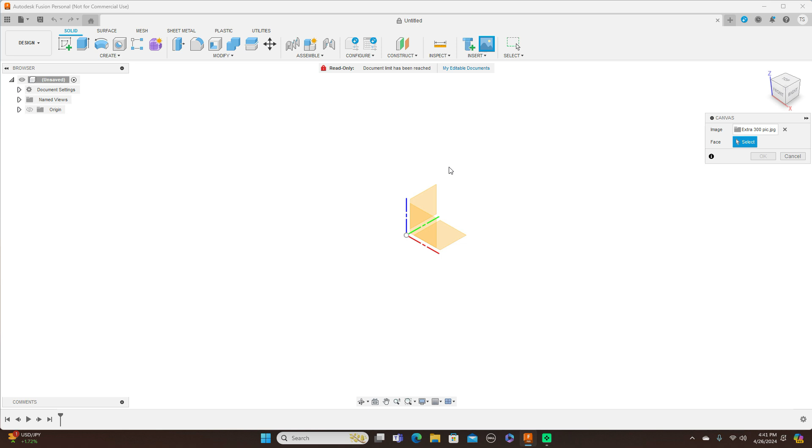First I'm going to need some pictures of the Extra. To insert them on a canvas, I come up here to insert, click on canvas, then insert from my computer, go to my D drive, Extra 300 pics, open that, and put this picture on this plane, because this is going to be the side view. Then drag this out and click OK.

Next, come over here to Canvases and change the name of this to Side. Then right click on side and click calibrate. I'm going to make this 2 meters long, so I'll measure from here all the way to back here and change this to 2000 millimeters, which is 2 meters.

Click enter. Now the picture disappeared because it made it much bigger, so I'll use my middle scroll wheel and scroll in. Turn on the origin over here. Now I want to line this front nose here to right here, so I right click on side again and click edit canvas, then move the little square till this is about there.

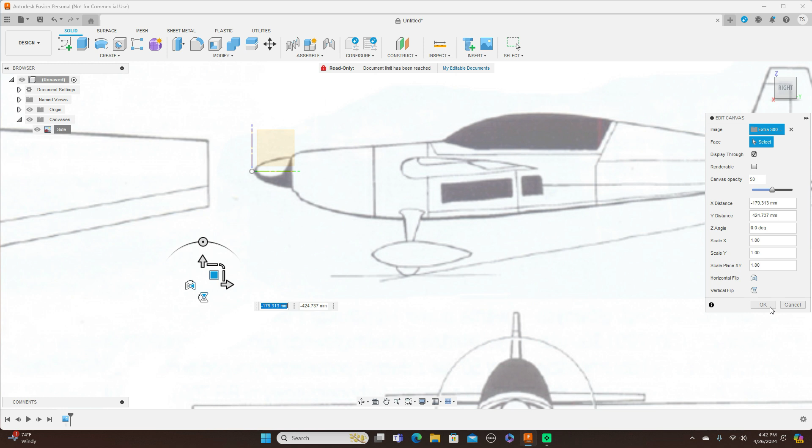Click OK. I'm going to do the same thing for the top view and front view. Turn this over here, come up to insert, canvas, insert from my computer, extra picture, open, click on this, drag this out. This is the top view, which is this view here. I need to rotate this, or you can just flip it, which I did.

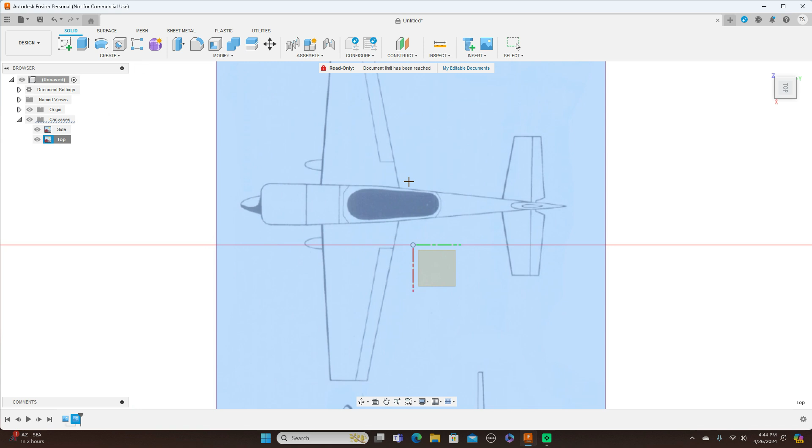Click OK, move it down a little first, then click OK, and rename this top. Right click on the top and calibrate, and this is 2 meters again, here to here.

Right click on top again, and this time click edit canvas, because we're going to move this nose to here also. Click OK. And that's what we have so far.

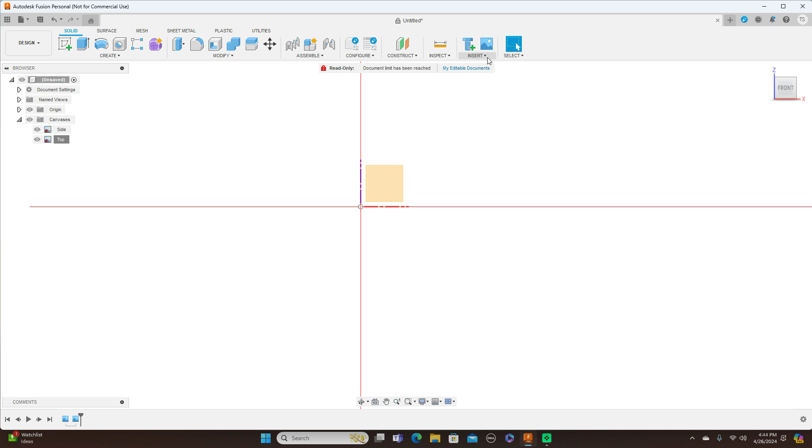Add one more picture to the front. Come up here, insert, canvas, insert from my computer, this picture here, open. This is the face. Click OK, change this to front.

Right click on the front and click edit canvas. I'm going to move this center to this center point up here, so I drag this square here. One thing I forgot to do is calibrate this, so let me cancel this.

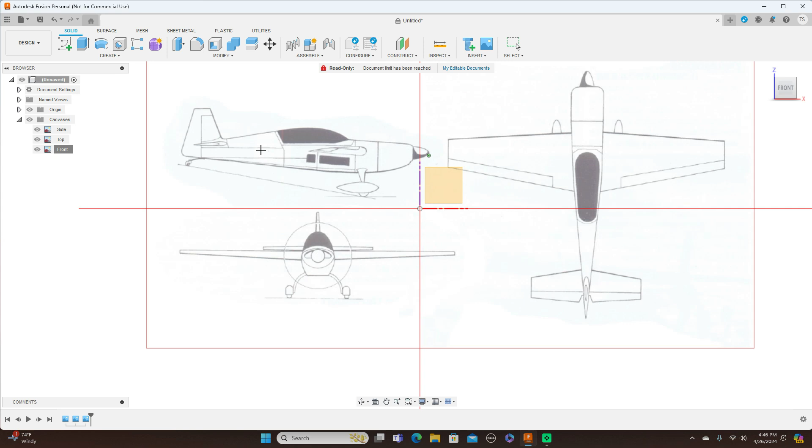Come up to the front over here and click calibrate, and set this to 2000, click enter. Now come over here to the front, right click and edit canvas, then move this nose over. Click OK. Now we have this.

All our pictures are in. Come over here to create form.

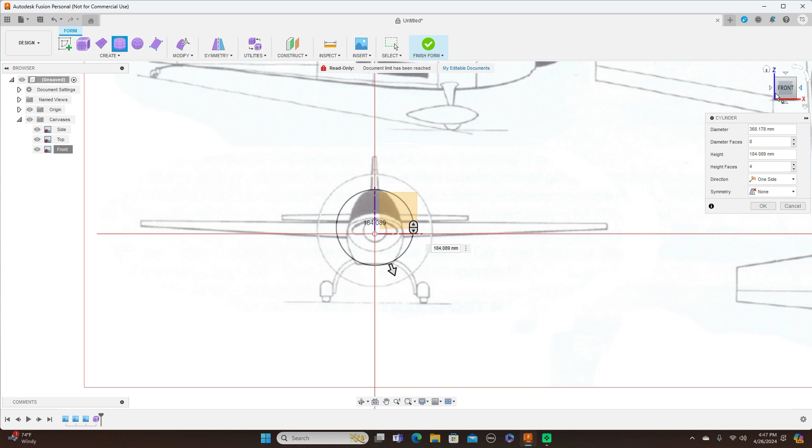And I'm going to use a cylinder. Click on this plane here, and for the cylinder, just imagine this is the circle in the center where I'm going to start. About right there, drag this out, click, one click. Turn to the side view, pull this all the way back.

Let me move this in a little because this is just a fuselage and not including the spinner, so move this in about what I think that spinner is. Add some height faces here, and click OK.

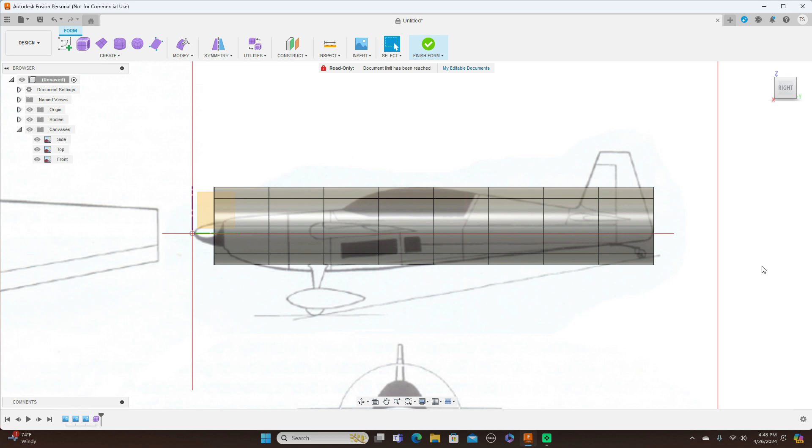What I want to do is select this whole thing here and move it back. Click OK. Double click this line here, and I'm going to move that back a little. Click OK for now.

Have a look. All right, now we begin the process here. Double click these to select the complete ring around.

Now this Extra 300 is not a difficult airplane to model, and I selected this one just for practice, since some people want to learn how to model aerobatic planes as well.

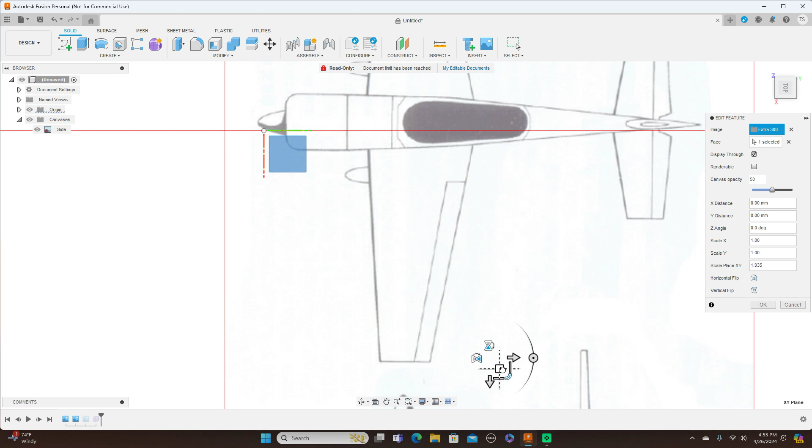Drag this wheel out a little. Okay, now that's a little too big, I'll drag this in a little more. And that's about right. So now we do here, edit this, and we're back to this.

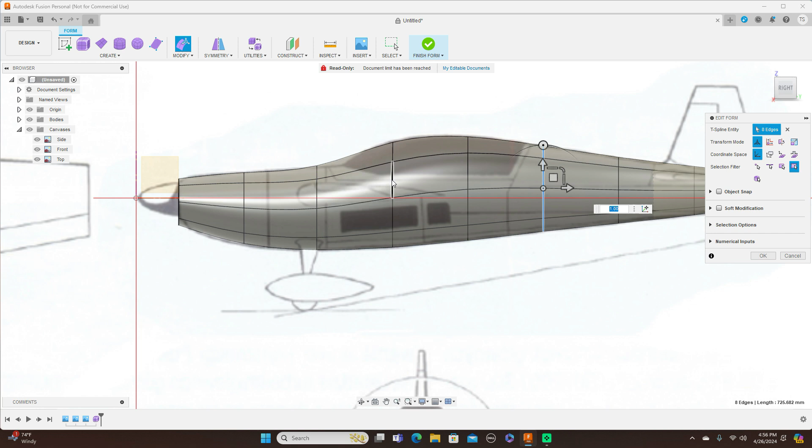Okay, this is what we have so far. Now I'm going to add another edge right here. Double click this line here, come up here to modify and insert edge, change this to exact, and click OK.

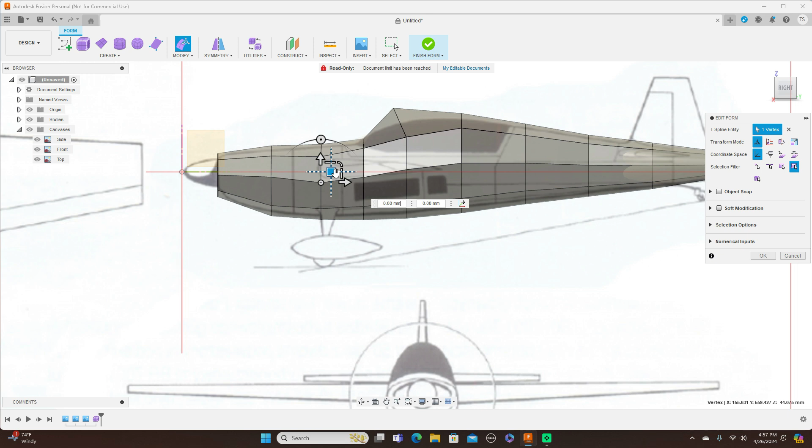Okay, let's look at this in box mode, which is Alt 1. And I'm just going to straighten these up. Okay, and get out of box mode is Alt 3. And that looks pretty good.

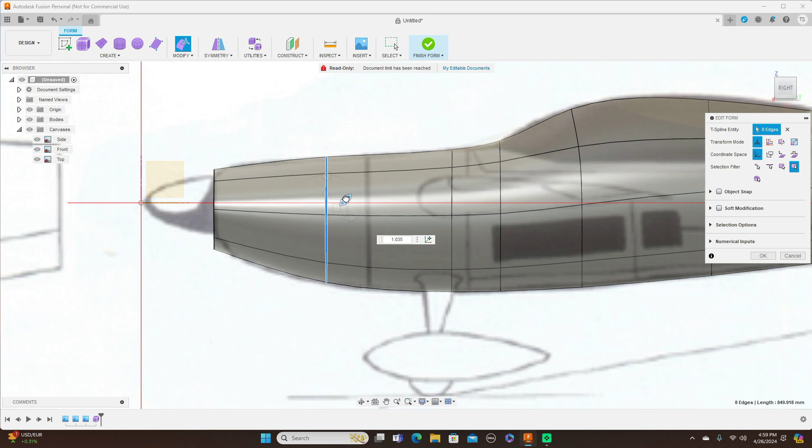Didn't like that. Okay, now this there.

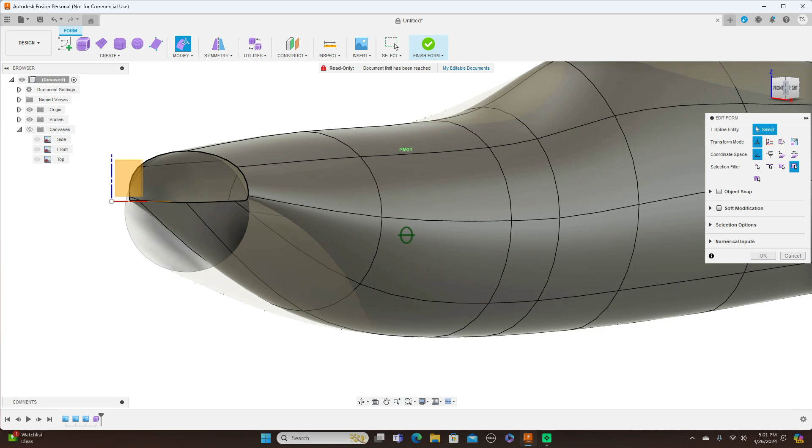Now what I want to do here is click this. I'm going to have to put a line in here. Let me cancel this, go back. Okay.

I need to put another section here. So double click this line, come up here to modify, insert edge, and click OK.

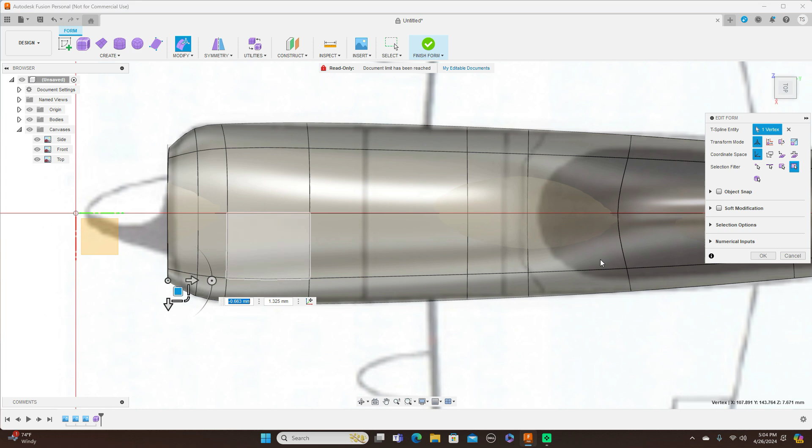And I put another edge here. Let's see what we have so far. All right, looking pretty decent. I want to pull this out here, or edit.

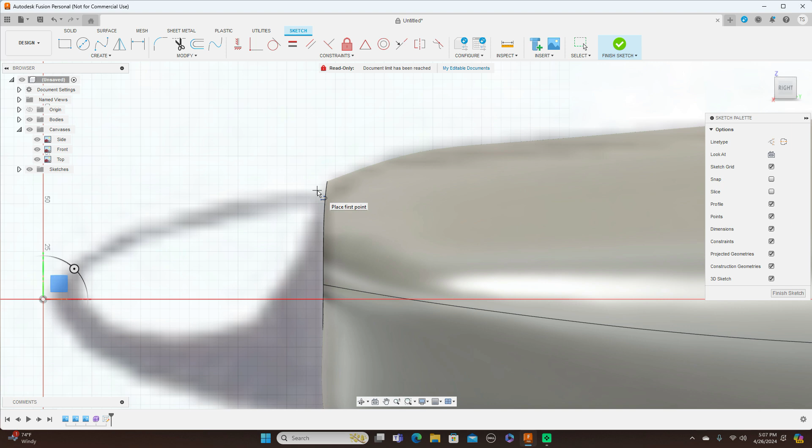Now, I'm going to do the spinner. The spinner just create on this plane here, and I'm going to draw a line from here.

Then come over here to fit point spline, click this, click on this line here, and get the shape of your spinner.

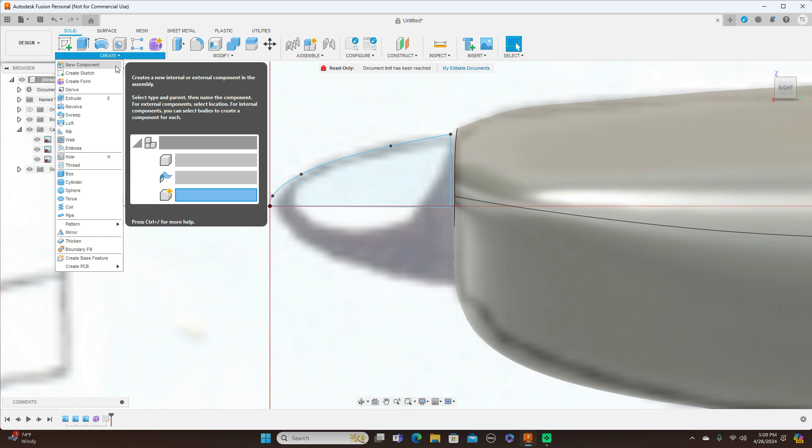Okay, that looks pretty decent, profile of it. Go ahead and finish sketch. Come over here to create and revolve. We want to—not revolve, there, okay. Select profile, profile is selected, and the axis is going to be this. And click OK.

Look at this from the front, and it looks pretty good. The spinner can go up a little.

So if I want to move this, just come over here to bodies, and it's the spinner. Right click on it and move. You could have did it this way here, or you could have clicked this, then click this. But do it this way: move copy, and just move this up a little. Click OK.

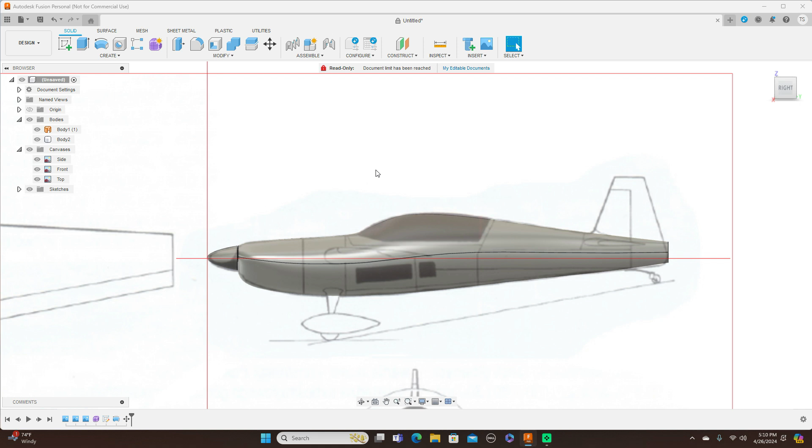Turn off the canvases. We have that. And turn the canvases back on. Now I'm going to do the wings. Let's go ahead and turn the bodies off.

And we come up here to create sketch. I want to create a sketch on this plane here, and I'm going to draw a line—L for line, or come up here to create and do it—from there, a line about from here to about here. Then look at this from the top, and you can see that's about where the wing is there. This needs to come back a little more here, so just drag this back. And finish sketch.

I'll come up here to construct, plane at an angle, and this is the line we're going to use. This is 0 degrees, and click OK. Now we have this line here.

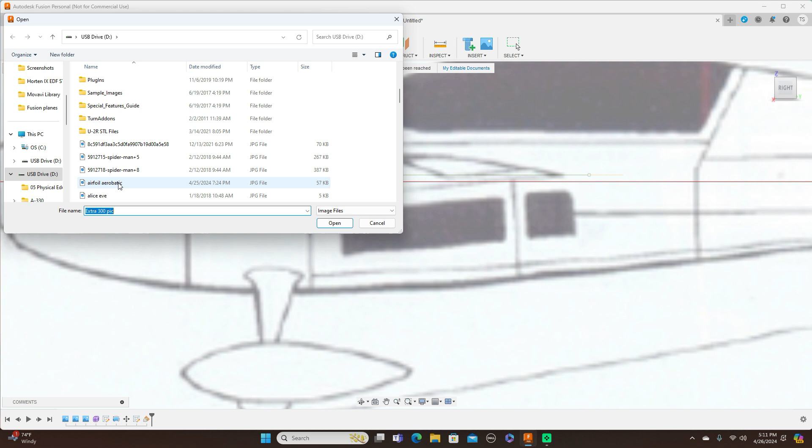What I want to do now is insert an image of the profile. So come up here to insert, canvas, insert from my computer, and this is a wing. Flying wing, no. This is it right here, airfoil aerobatic. We open that. Want to put it on this profile here.

Scroll out to make it bigger, then I'm going to move this back. And I'm using this one right here, then line that up. That looks good, and click OK.

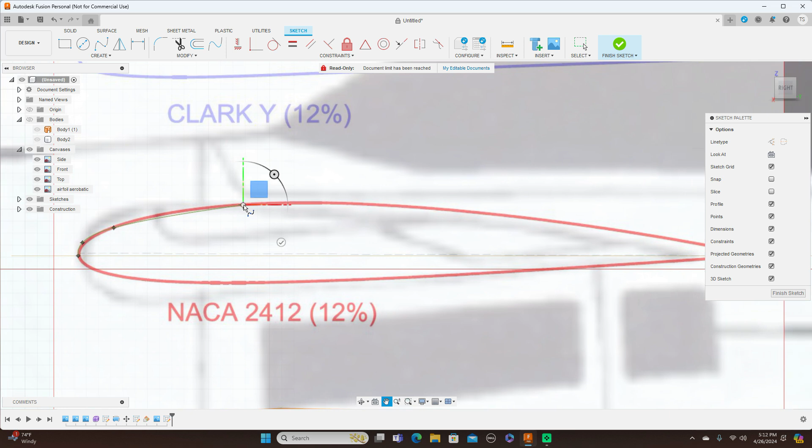Now we're going to trace this. So we come up here to create sketch on this plane here, and I'm going to trace this with fit point spline. Put another one here.

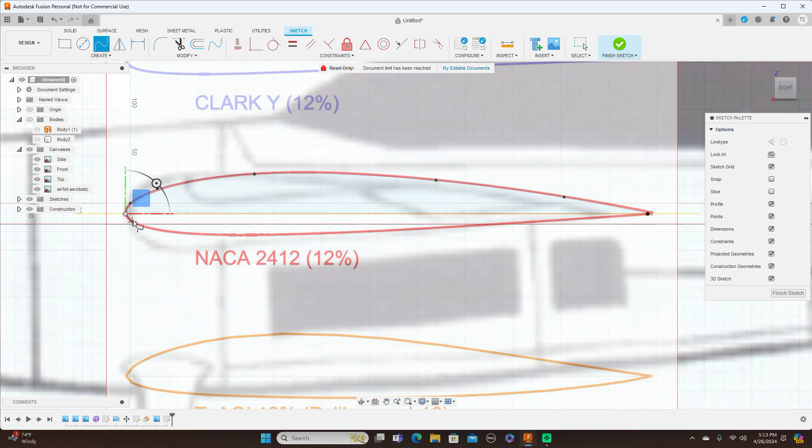Draw a line from the leading edge to the trailing edge, and trace the bottom of it. Okay, finish sketch, and we can turn this off.

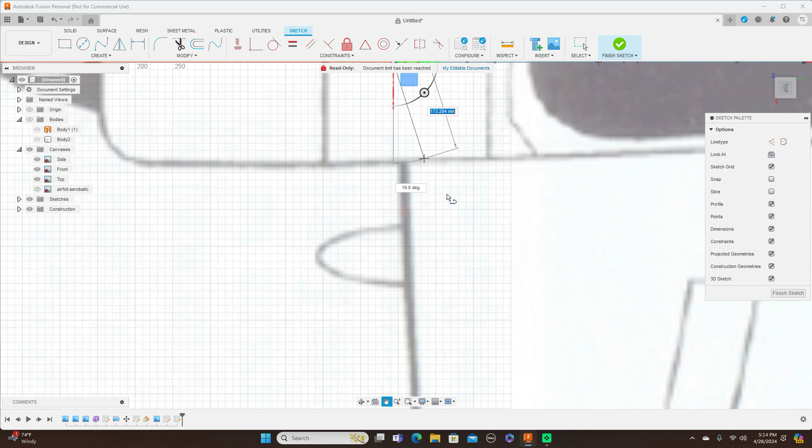Now we're going to create a sketch on this plane here, so I click this plane and come up here to create sketch. Click that. Then I'm going to use a line, just dragging this out to make sure I get the proper one, which is this here. And another line for the back. Go ahead and finish sketch.

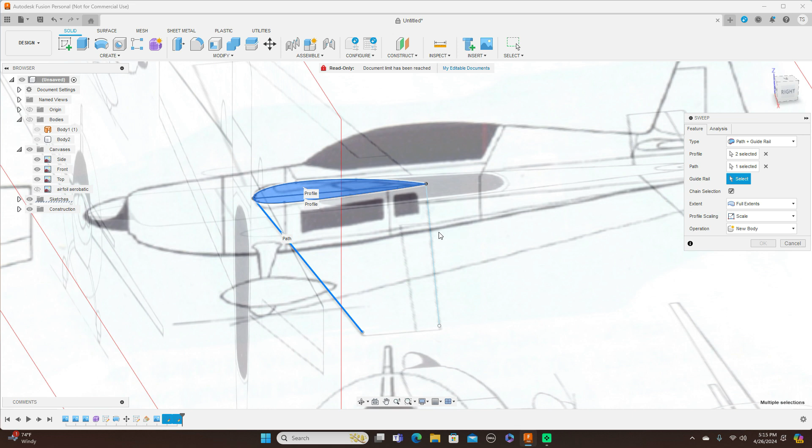Then come over here to create, use a sweep, and we're going to change this to path plus guide rail and change this to full extents. Then we click this profile and this profile. The path, this line, and the guide rail, this line, and click OK. And turn the bodies back on.

Turn the canvases off, and we have this now. Come over here to create, mirror, this, and the mirror plane is going to be this. And leave this as join, click OK. And we have this.

Turn the canvases back on. Create a sketch on this plane.

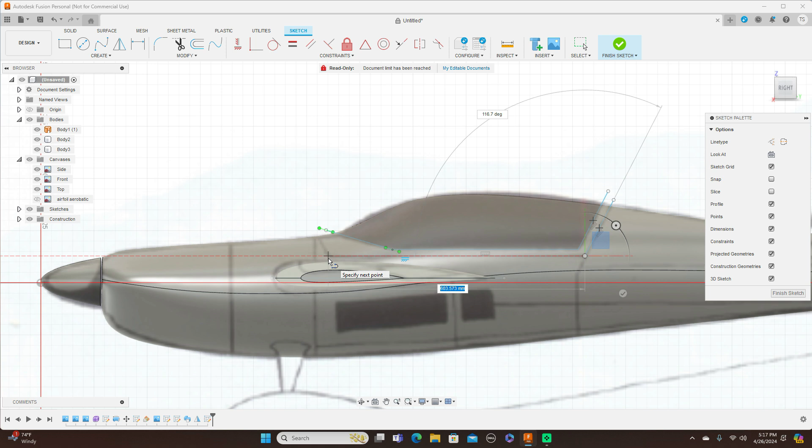Finish sketch. Then we're going to come up here to split body. This is the body to split. And our splitting tools would be this, and click OK. And turn the canvases off.

So far, this is our extra. Now the horizontal stab back here is done the same way as I did this, and the vertical stab will be done the same way also. So what I'm going to do now is show you how to do the wheel pants.

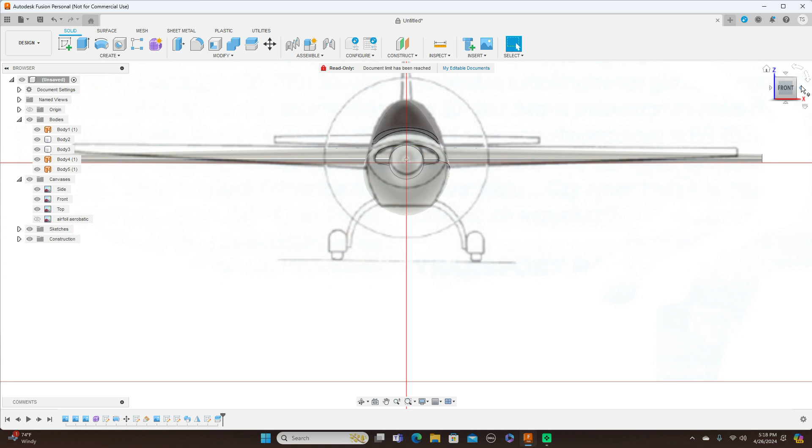Now there are all kinds of ways to do this. I'm just going to use an offset plane. You don't have to use an offset plane to do this. Turn these bodies off so I can see. You don't have to use an offset plane, but I'm just using it as lined up about right there to the front of there, and click OK.

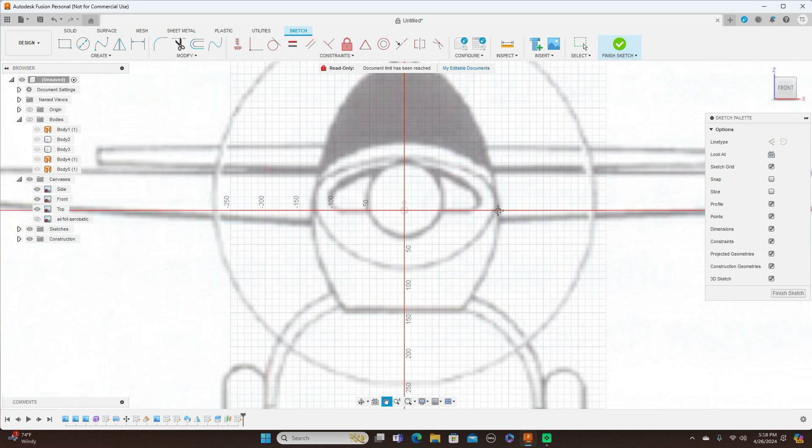And come up here to create sketch. I want to create sketch on this plane here. Let me cancel this, finish, go ahead and finish this.

What I want to do first, come here to create form. And I am going to use, let's see, go ahead and use a box. I'm not on the right plane, but that's okay.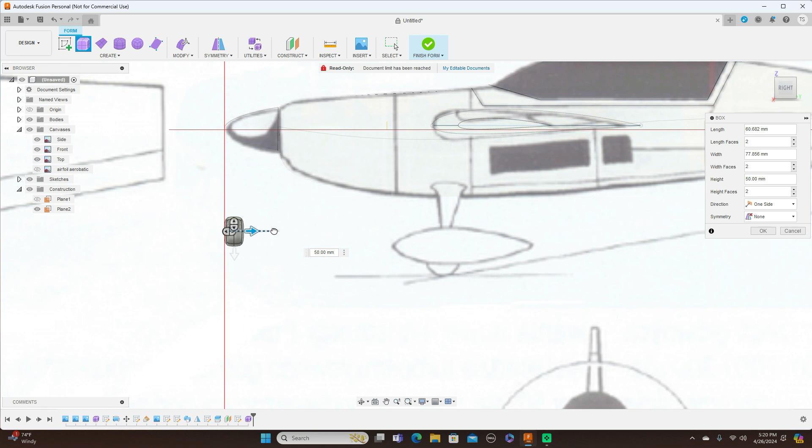And now I'm just guesstimating the length of that wheel pant. Like I said, it doesn't matter that it's over here. It's just that I have to move it now, that's all. So what I do now is click OK. Then I just move it back here. Click OK.

I'll just go ahead and use this side view here. So now we do the same thing.

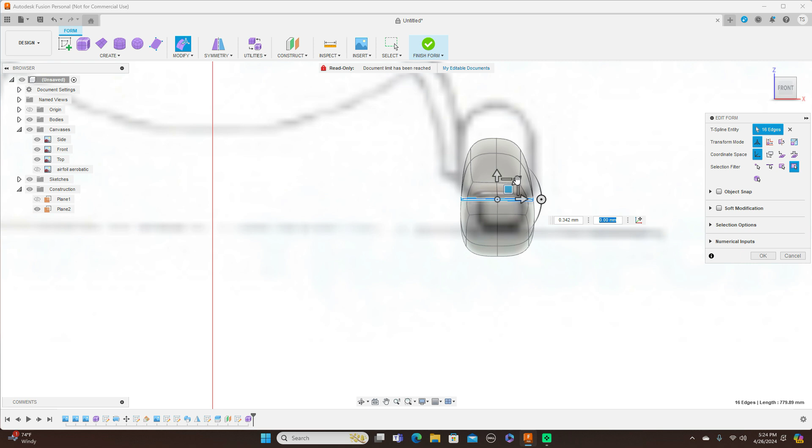And click OK. Finish form. That's pretty much the wheel pant. And once again, just play around with the shapes till you get it exactly how you want it. I don't want to waste your guys' time sitting here another 10 minutes getting this exact, but what I just showed you how to do, that's exactly how you're going to just move all the stuff around till you get it how you want it.

Come up here to create, mirror. This is what we want to mirror. And the plane is this. Click OK. Now we have that.

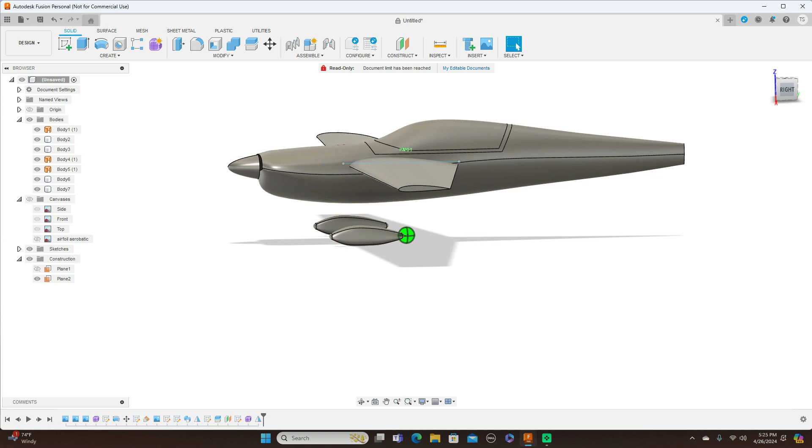Now the vertical fin, I'll do that. And to do that, just come up here to create sketch. Or first, let me do something else. Go cancel that, and turn on the canvases. Turn off the bodies. Then come up here to create sketch on this plane here.

I'm going to use line, L for line. Just imagine this line coming down here, to back here. And finish sketch. Then come up here to construct and select plane at an angle. This is the line here. This should be 0 degrees, and click OK.

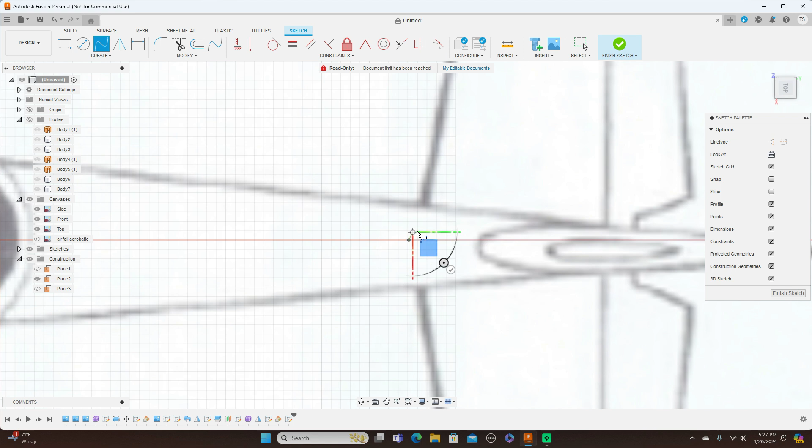Now I want to draw on this plane here. So click this plane and create sketch. Then I'm going to use a fit point spline here. I'm just using an arbitrary airfoil for this. If you have a picture of an airfoil, go ahead and put it in here. Well, I could use the same airfoil that I used for the wing.

And I'm going to draw a line from here to back here. And then I'm going to come up here to mirror. This is the line I want to mirror, the object. And the mirror line is going to be this. And click OK. Go ahead and finish sketch.

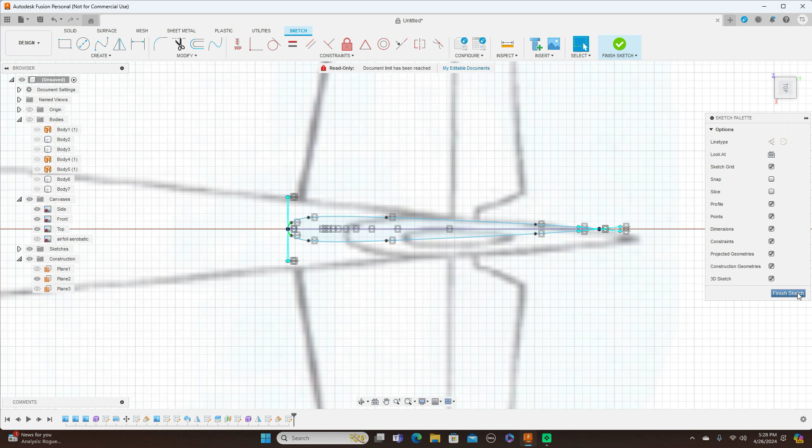Now come over here to create sketch on this plane here. And I'm going to use the line here. Fit point spline. Now I'm not sure if this is going to work, but we'll give it a try and find out.

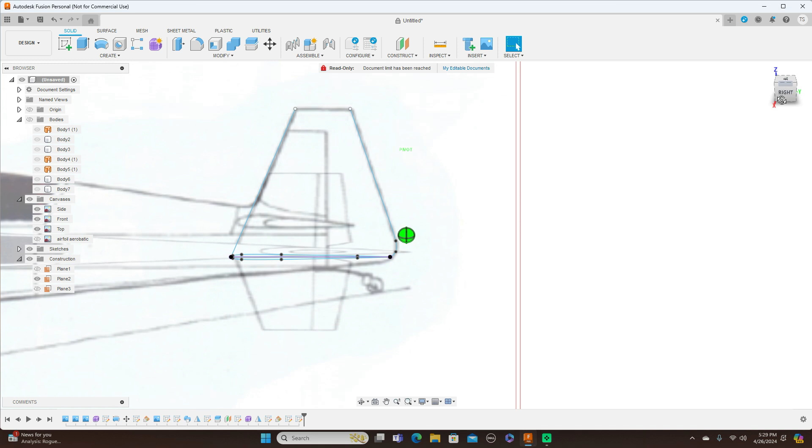Create sketch. I want to use sweep. This profile, this profile. Let's try this as path. And try this as a guide rail. And click OK.

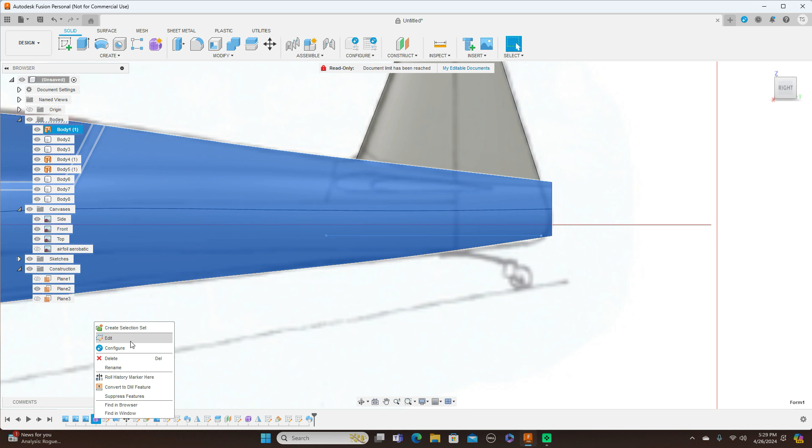Okay, let's turn the bodies back on. And we have this. Now here what I'm going to do is come back down here to this body. Move this in. And also.

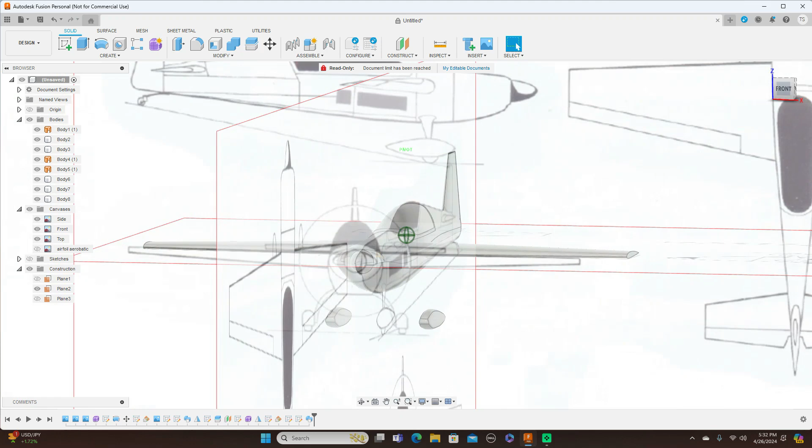Now you're probably wondering how to do this gear up here. Now me, I am thinking about that—how would I do that gear? Okay, here's just one way that just came to my mind.

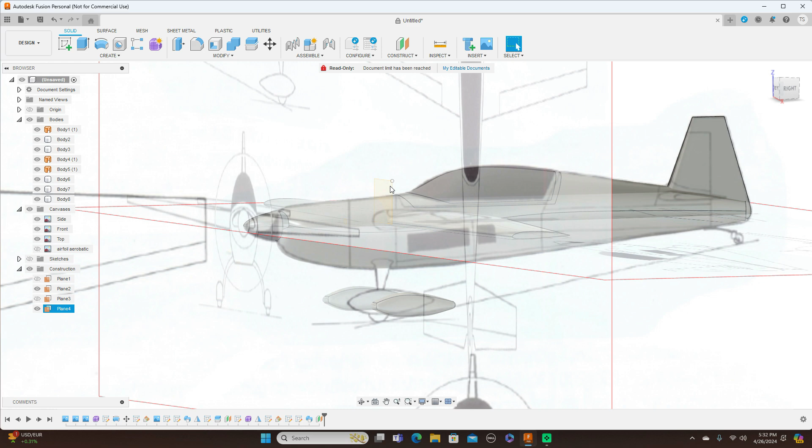First, I would come up here to construct, do an offset plane. Here, move this back to about the front of here. Click OK. Next, I want to draw on this plane here, so click this plane, create sketch. Then use a fit point spline. Click OK. Another fit point spline.

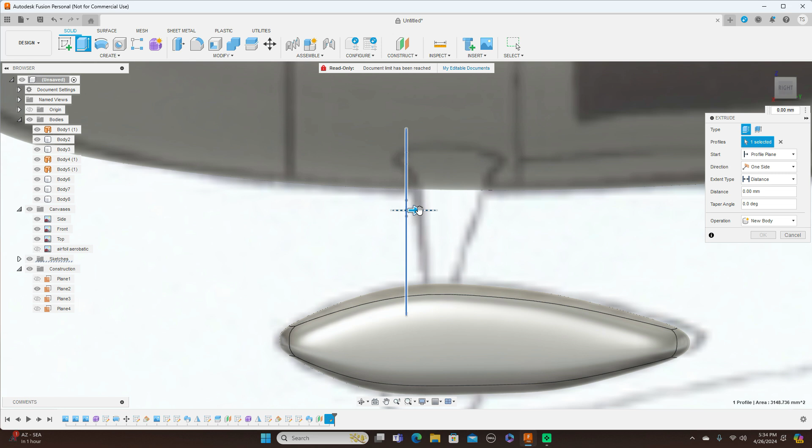Finish sketch. Turn the sketches back on here. Use an extrude on this profile. Pull this back. Click OK.

Turn the canvases off. Okay, so that's the start of it. Now come over here to create, mirror this.

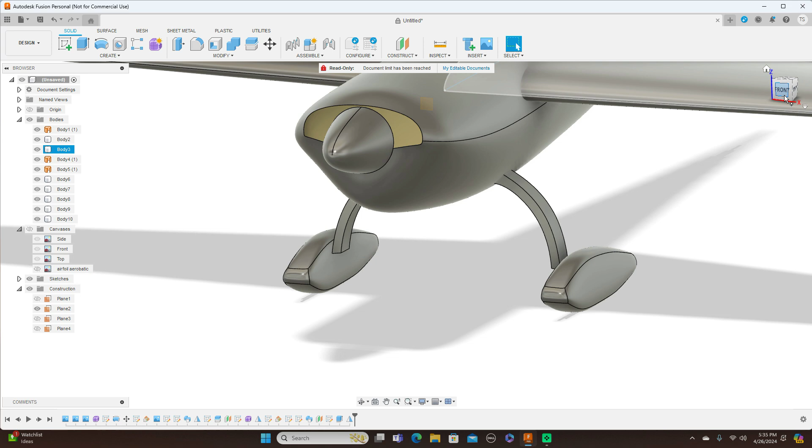Click OK. Now that's just a start of it. I put the flares and things back here on it, but don't have time for that right now. If you want to see me finish up the gear here, just let me know in the comments and I'll show you how to do that.

So now what I'm going to do is show you how to do the wheels. Turn the canvases back on.

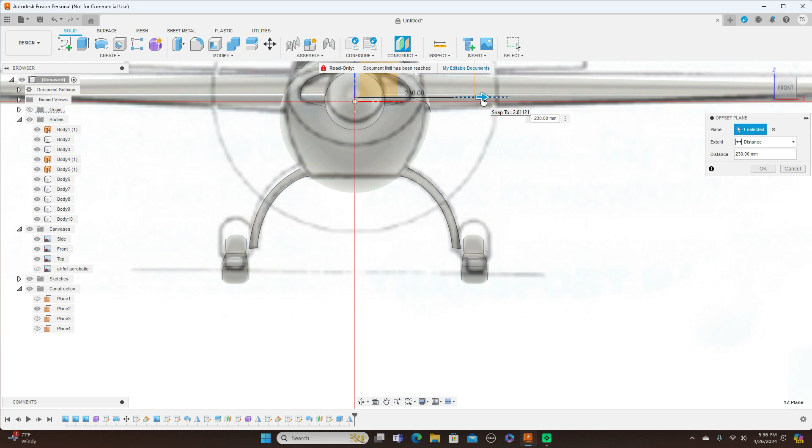I'm going to use another offset plane. Just imagine this coming up here for the wheel. Click OK. Now I want to draw on this plane here.

Finish sketch. Extrude again, that's the profile. Let me come over here to symmetric. Pull this out a little.

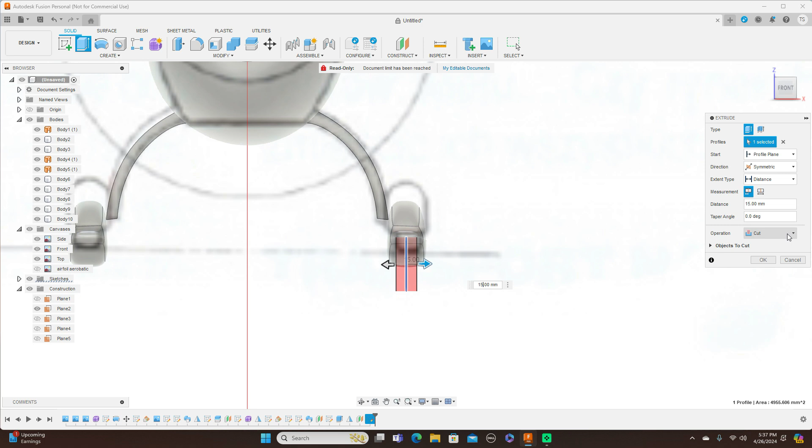And it looks to be about 15. Change this to new body and click OK. Turn the canvases off.

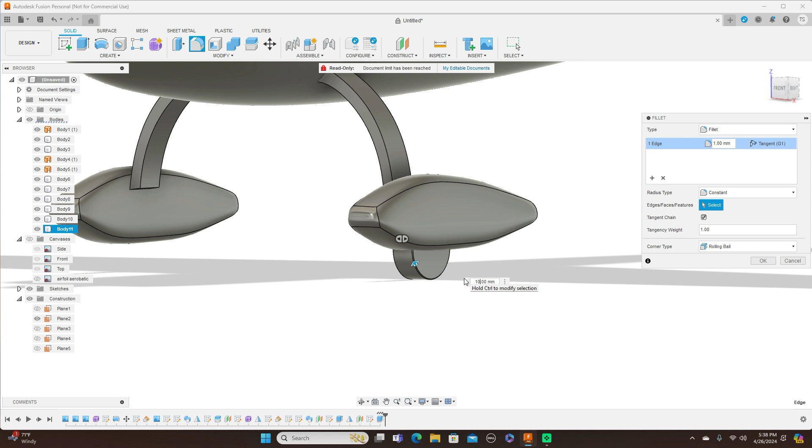Okay, come up here to fillet. This, and possibly 10. Okay, and the other side here.

Modify, fillet this, and 10 also, and click OK.

Then come over here to create, mirror this, the mirror plane - okay, that's the wrong one, so erase that. The mirror plane is this. Click OK.

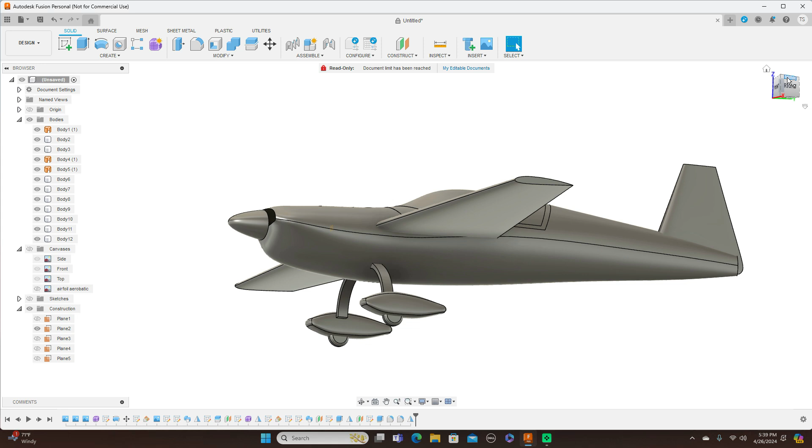Turn off the sketches. That's what we have so far now. It's looking pretty good.

All right, last thing here, I'm going to put the horizontal stab in here. So turn the canvases on and turn the bodies off. Create a sketch on this plane here.

Use line, letter L for line. Start here, bring it back to about here. Look at it from the top. That looks about right. I mean, it looks like it could come up a little more here.

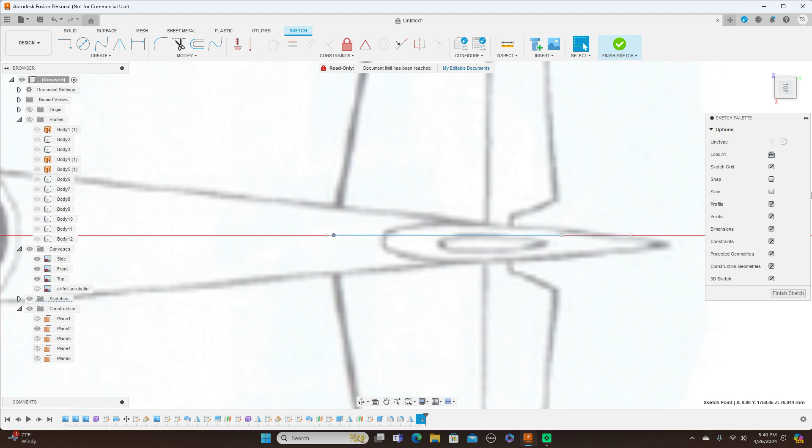Okay, go ahead and finish sketch. Turn the sketches back on. Now I'll create a sketch on this plane here. I'm just using another arbitrary airfoil here.

Hit P for project, project this line. Click OK. And do the bottom here.

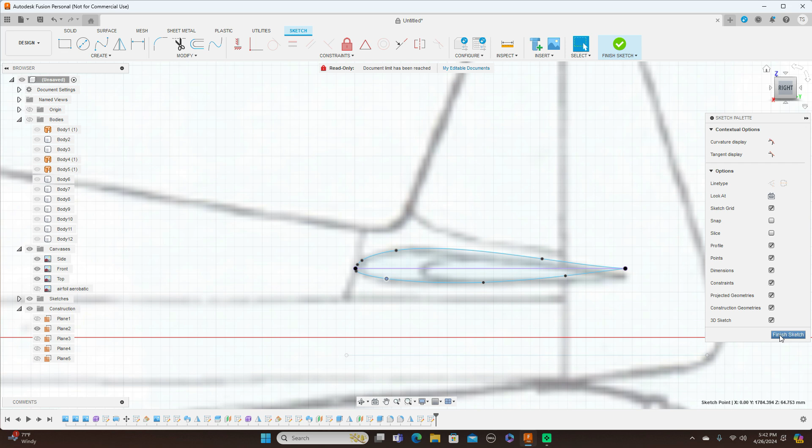Finish sketch. Okay, now we come up here to construct. We're going to use plane at an angle again. This is the line, and click OK.

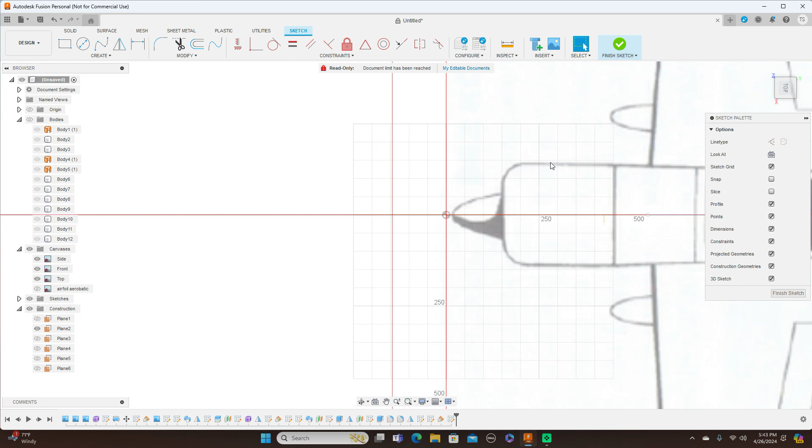Now I want to create a sketch on this plane, so click the plane, then come over here to create sketch. Looking at it from here, make sure I select the correct line.

L for line. Turn it back to the top. And another line, L for line. And finish sketch.

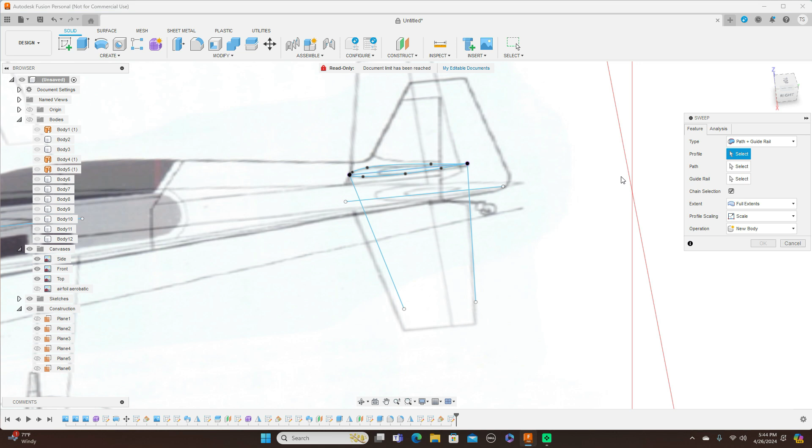Come over here to create, and we're going to use a sweep. Path plus guide rail, full extent, select profile, this profile, and this profile. This is the path, this is the guide rail. And click OK. We turn the bodies back on and turn the canvases off.

Create, mirror, this is the body, mirror plane is this, join and click OK. Turn the sketches off.

And this is how you model the Extra 300. Now, there's some things I did not do due to time. I wanted to show you guys how to get this modeled all in one session here, and so I didn't do a lot with the front up here to make it look a little better. And I could do a little more here because I didn't like the way this goes in.

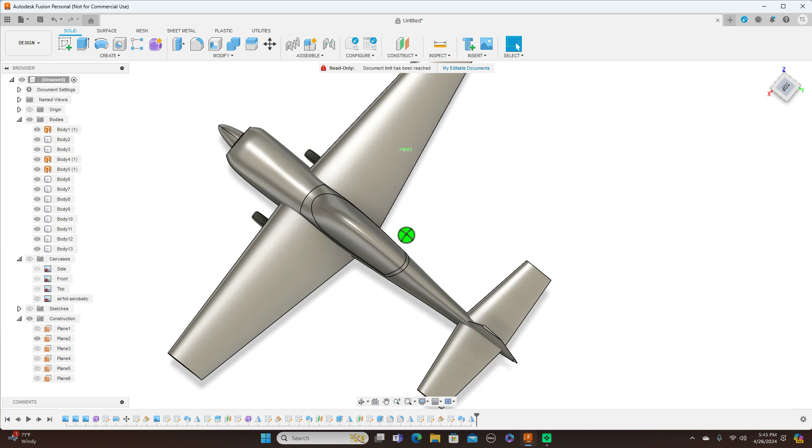But just play around with all that stuff until you get it correct, because I've given you all the tools that you need to get it exactly how you want it and everything. Go ahead and close the back here. You can do that and play with these shapes till you get them like you want them. The last thing I'm going to do here is just add some color to this and make it look better.